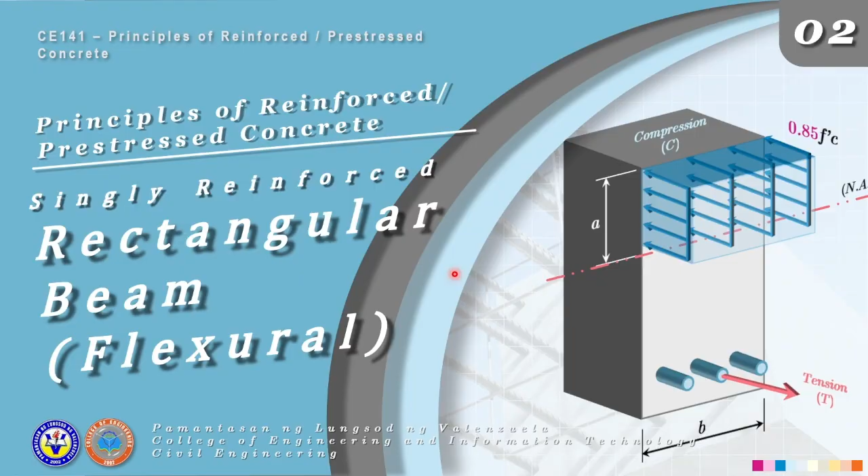In our discussion we will have two parts: analysis and design. For part 1, our focus is analysis. When we say analysis, we are not yet choosing the beam size or rebar — that is already given. What we will do is check the capacity of the given section. Later, our final objective is to get the nominal capacity, then we apply the strength reduction factor, since our emphasis is on ultimate strength design. So we will also get the ultimate moment capacity, and later we will compare those two. The basic idea is the emphasis on our ultimate strength design method.

Before we start, we need to understand the behavior of the beam, because a beam is a structural member that primarily resists bending or flexure. When a beam has a load, it bends, and when it bends, part of the beam is compressed and part is stretched. So for positive bending, we will later discuss compression and tension. Since concrete is weak in tension, we need to add reinforcement. That's why in singly reinforced beams, we need to emphasize the location of our steel reinforcement.

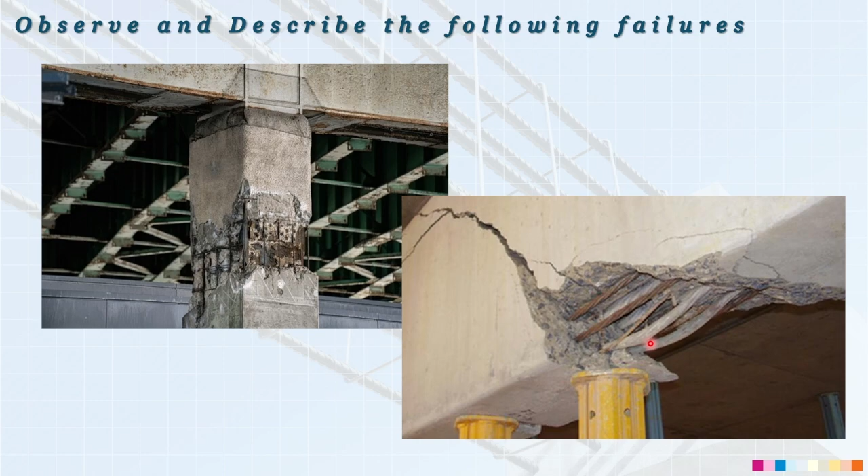As you can see in this structural failure, the steel is ductile, meaning our main reinforcement or steel bars are still intact. However, if you notice in this failure, the concrete failed or chipped away suddenly. So you are seeing this as an over-reinforced design — the highlight here is that concrete will fail first before steel. What does that mean? Before the steel yields or gives way, the concrete in compression experiences crushing or sudden crushing. Technically, when there is excessive steel reinforcement on the tension side, the steel does not yield.

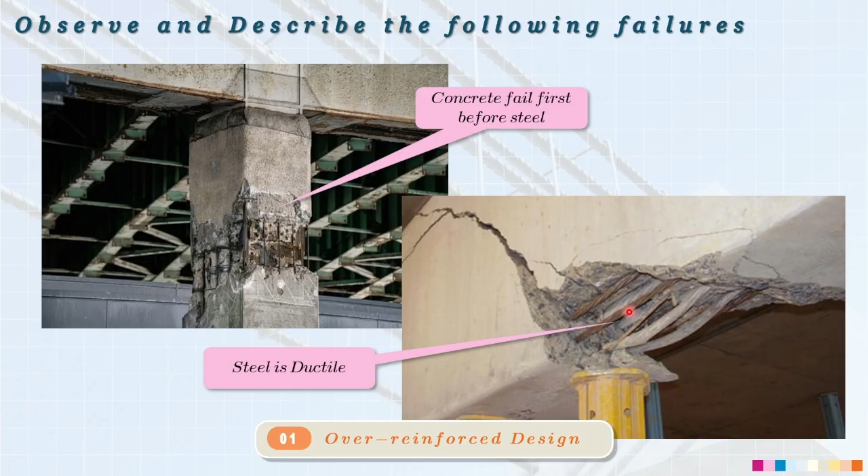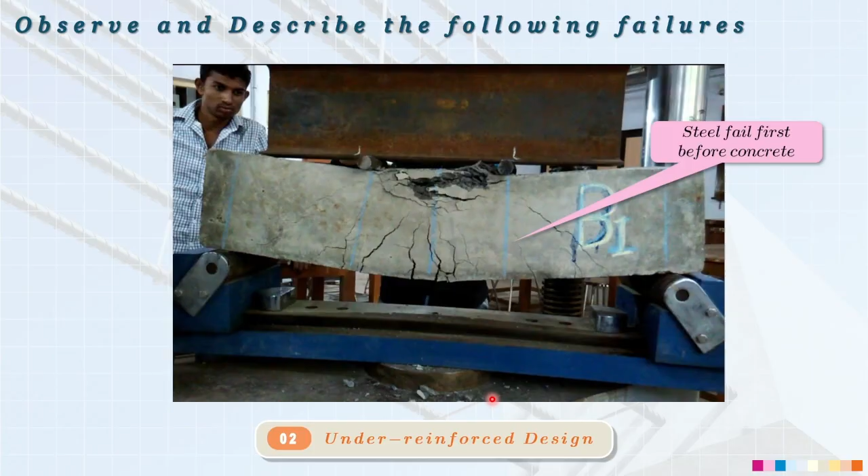On this text, on the analysis of singly reinforced beam, beams are structural members that mainly resist bending or flexure. Kapag ang beam, ang primary action niya is bending, of course may shear din. Pero ang pinaka magiging emphasis ng ating topic under this code provision, which is section 409.5, which is the design strength. Ibig sabihin lang nito, this is the code provision for our beams, sa mga horizontal members natin.

But to have an emphasis for this topic, ang magiging internal reaction na concern muna natin dito is all about bending moment, which is as you can see here in the first equation, yung ating nominal capacity multiplied by strength reduction factor should be greater than or equal to our design capacity or the ultimate bending moment. Ibig sabihin lang nito, this is the same principle coming from the ultimate strength design.

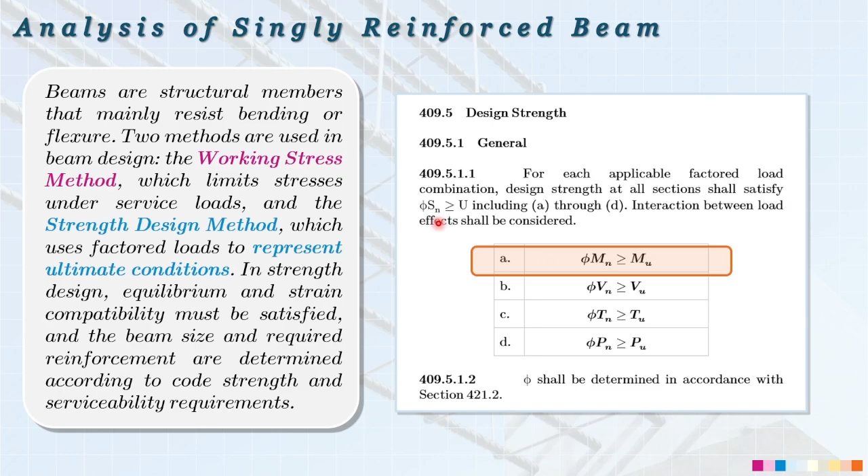All right, so let's proceed on our sectional analysis, okay? So meaning, hindi isang buong beam yung kailangan nating i-analyze dito. May mga portion lang tayo na kailangan nating i-analysis, especially on the design portion later on. So let's have here a simple supported beam.

So we have a uniform load and then ang maximum, kung meron tayo ditong simply supported beam with a uniform load, obviously yung magiging maximum moment natin ay nasa gitna or on this section. Dito sa section natin, kukunin natin yung mga forces na nag-act dito sa ating beam section, particularly yung compression force, tension force, the neutral axis depth, compression depth, block depth, steel stress, and yung mga moment capacities natin.

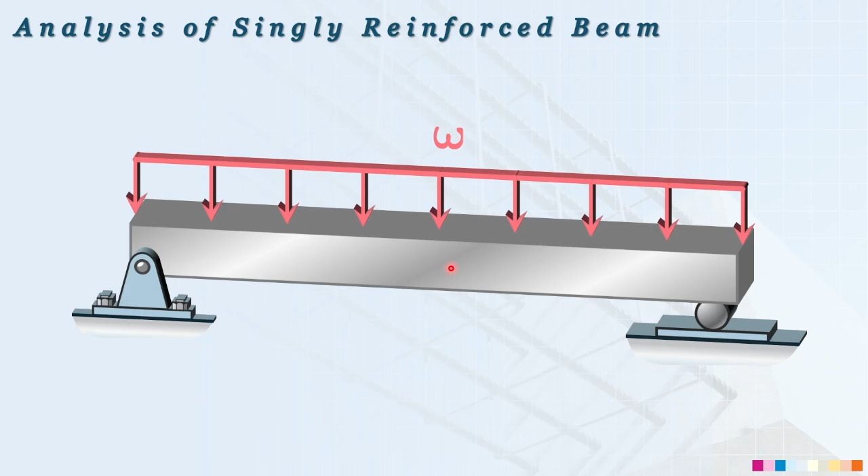Okay? So sa analysis natin ay parang hinihiwa natin yung beam sa critical section, then titignan natin kung ano yung nangyayari inside. Okay? So let's emphasize further.

So of course, kapag nilagay natin yung load sa ating beam, makakaranas yan ng deflection. Alam naman natin na ang deflection primarily ay nanggagaling sa bending. But of course, in order to further observe yung ating bending moment, as you can see here, magkakaroon tayo ng dalawang stresses.

Una, yung stress natin dito sa portion na ito kung saan yung top portion ay naiipit, ibig sabihin lang yan, it will experience compression. Doon naman sa ilalim, which is wala dito sa ating diagram, pero best to assume na kung ano yung nararanasan sa compression, babaliktad yung nangyayari sa baba natin, kasi yung bending natin dito is going downward, as you can see dito sa ating uniform load. So sa taas nakakaranas ng compression, sa baba nakakaranas ng tension on this part or section ng ating beam which is nasa gitna.

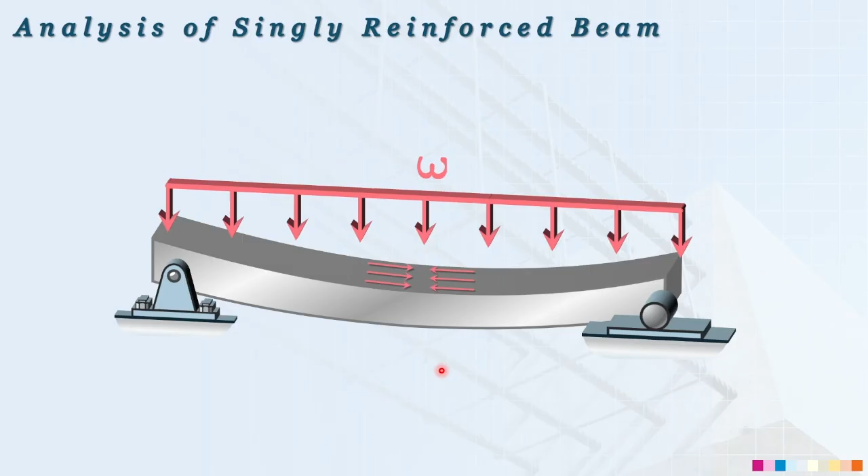All right, so let's have now the section. After natin ma-determine yung location na i-analyze natin, let's have this section. Best to assume that this is the center, or ito yung section midspan ng ating simple supported beam.

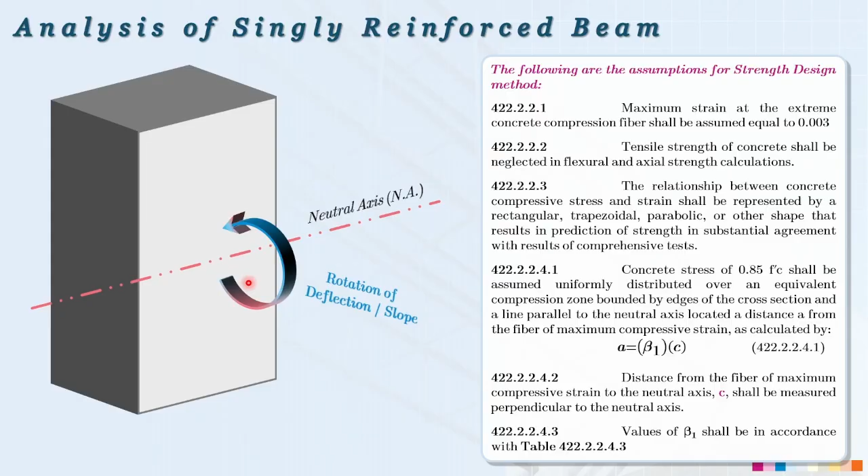As you can see here, yung rotation or yung deflection niya is being downward. So very important na ma-emphasize natin yung magiging bending ng ating beam section, dahil nga sabi ko nga kanina, this will emphasize dito yung compression and yung tension. Dalawang klaseng axial stress yung nararanasan ng ating bending moment.

So on the top portion, it will experience compression. On the bottom portion, this is to experience tension. Ibig sabihin, yung kalahati ng ating beam or the upper portion of our beam experiencing compression. Sa baba naman, nararanasan niya dito is tension, kasi nga nababatak nga yung fiber nung ating beam.

And actually, if we will refer in our code provision, nasusulat din yan. Ang emphasis natin dito is section 422.2.2.3, which is the relationship between concrete compressive stress and strain shall be represented by a rectangular, trapezoidal, parabolic, or other shape that results in the prediction of strength in substantial agreement with the results of comprehensive test. Ibig sabihin lang dito sa ating code provision, this is the general idea that our compression and tension, you can represent it into different kinds of shape loading.

Kaso, from your strength of materials, ito talaga yung emphasis ng itsura ng ating mga stresses. Ang problema lang natin dito is, since meron nga tayo ditong beam, dalawa yung nararanasan niya, compression and tension.

Okay, so in this section, alam naman natin, ulitin ko lang na yung distance ng fiber maximum compressive strain to the neutral axis C shall be measured perpendicular to the neutral axis. So once again, emphasis ko lang dito is yung value ng ating C is only the distance from the compression up to the neutral axis under parabolic stress block.

However, class, mahirap siyang i-compute numerically. That's why we need to complement it using this code provision, under section 422.2.2.4.1 na nagsasabi dito, concrete stress of 0.85 F prime C shall be assumed uniformly distributed over an equivalent compression zone bounded by the edges of the cross section and a line parallel to the neutral axis located a distance A from the fiber of the maximum compressive strain as calculated by this equation.

Okay, so emphasis lang natin kasi mahaba yung ating code provision for this one. Ang ibig sabihin lang niyan, para ma-compute mo itong parabolic stress block, ang pwede natin gawin dito, pwede natin siyang i-convert into rectangular stress block.

Okay, kaso once you convert it into rectangular stress block, yung ating variable C, which is the depth of the compression, ang mangyayari ngayon diyan class, mako-convert na siya into variable A. Na kung saan ang variable A natin, ang tawag natin dito is depth of rectangular stress block. Kasi nga, from parabolic stress block na nakikita ninyo dito, na-convert na siya into rectangular stress block.

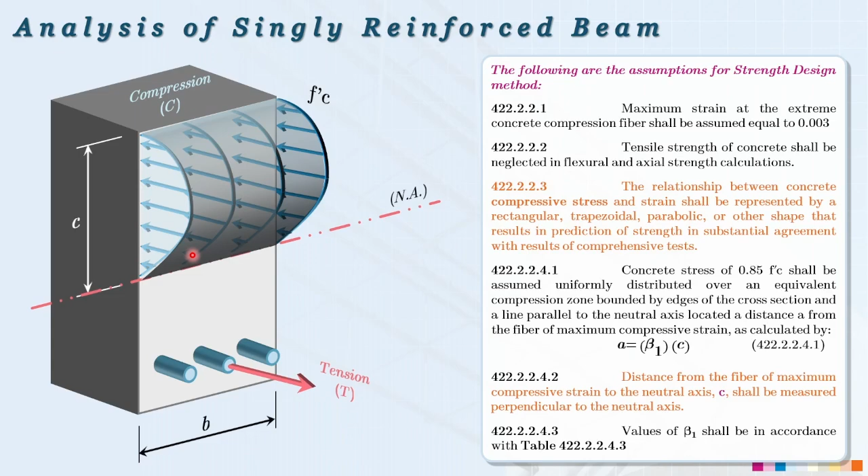Okay, kasi nga kung parabolic stress block ang gagamitin natin, actually wala namang problema. Kaso kasi class, gagamit lang tayo dito ng mga komplikadong integral calculus kasi nga, yung ating shape na nandito, ang mangyayari kasi diyan class, kukunin natin yung force. So ang mangyayari is stress multiplied by area.

Kaso kasi class, yung area mo dito, irregular siya. So para at least maging uniform, inaalalayan tayo ng ating NSCP code provision under this section na i-convert natin from parabolic stress block up to rectangular stress block.

So ang magiging emphasis lang natin, yung ating depth of compression, magiging depth of rectangular stress block, which is in terms of A. So para ma-convert natin yan, class, we need to multiply it with the beta 1. Yung beta 1 natin, this is just a factor so that we can convert it into depth of rectangular stress block. Kaso ano nga ba yung mga values ng beta 1 na pwede natin gamitin?

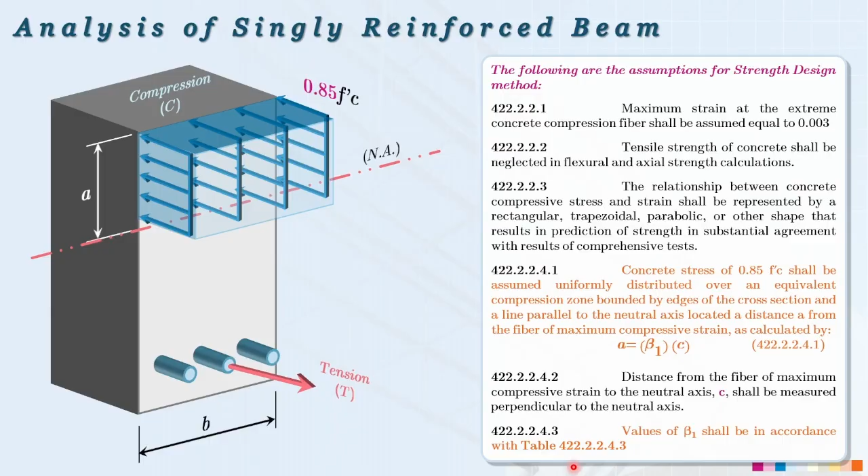Okay, so dito naman magko-complement itong code provision na ito, which is the section 422.2.2.4.3. The values of the beta 1 shall be in accordance with the table 422.2.2.4.3, which is presented in this table. So ito lang yung ating emphasis ng ating beta 1 para ma-convert mo yung depth of stress block, which is yung C, into depth of rectangular stress block A.

Okay, so ibig sabihin lang nito, yung ating beta 1, makukuha mo lang yung mga values niya depending on the values of our F prime C or on the values of our compression stress. So emphasis lang natin to. Makukuha mo lang ang 0.85 kapag ang value ng F prime C mo between 17 megapascal and 28 megapascal. So kapag nag-sit in right dito sa range of value na ito, ibig sabihin your value of the beta 1, automatically this is 0.85.

However, if your value of your F prime C is greater than 28 megapascal but less than 55 megapascal, you will use this special equation para magamit mo si beta 1, which is what you need to do here. You need to use this equation by substituting your value of F prime C, which is greater than 28 megapascal and less than 55 megapascal. So dito mo makukuha if this value of your F prime C falls under this criteria.

Okay, and lastly, for our last value of your beta 1, of course, if the value of your F prime C is more than 55 megapascal, ang gagamitin mo na dito, of course, the 0.65 as your value of your beta 1. Okay, so ano nga ulit ang emphasis ng beta 1? Para ma-convert mo yung depth of stress block into depth of rectangular stress block. Kumbaga, from parabolic, co-convert natin siya into rectangle.

Okay, so now since ito na yung magiging basis natin for our analysis, so we have some additional code provision na kailangan nating isatisfy or kailangan natin ditong gamitin. Okay, so let's proceed with the section 422.2, Design Assumptions for Moment and Axial Strength. So etong code provision na to, dito na natin i-emphasize yung mismong topic natin, which is the flexural analysis of a singly reinforced beam.

Okay, so let's proceed right away with the section 422.2.1.1 na nagsasaad dito, equilibrium shall be satisfied in each section. Okay, tapos pangalawa, the section 422.2.1.2, strain in concrete and non-pre-stress reinforcement shall be assumed proportional to the distance from the neutral axis.

So ibig sabihin lang nito, class, aside doon sa ating stress, okay, you need to also emphasize din yung paggamit natin dito ng strain, which is later on I will explain. I will explain dito yung maging relationship ng mga strains natin.

Okay, and lastly, under the section 422.2.2.1, maximum strain at the extreme concrete compression fiber shall be assumed equal to 0.003. So ang ibig sabihin lang nito, class, yung strain or yung relationship between ng deformation for our concrete is always ang value na palagi is 0.003. Kumbaga, fixed value na po yung magiging strain nung ating concrete.

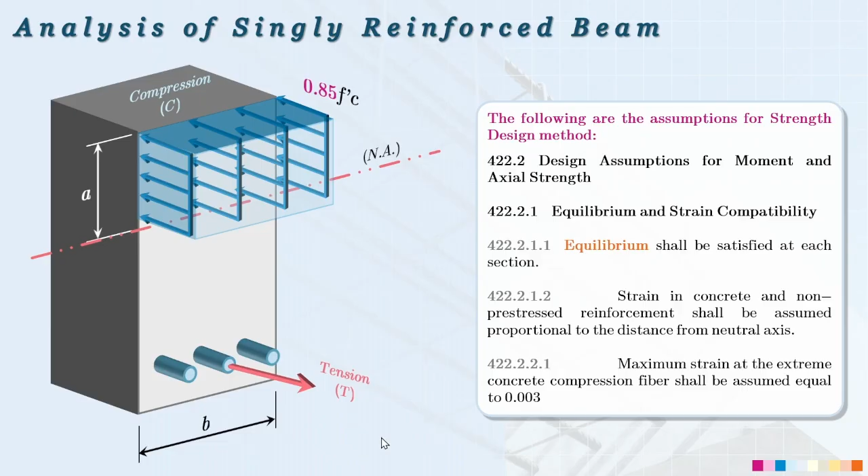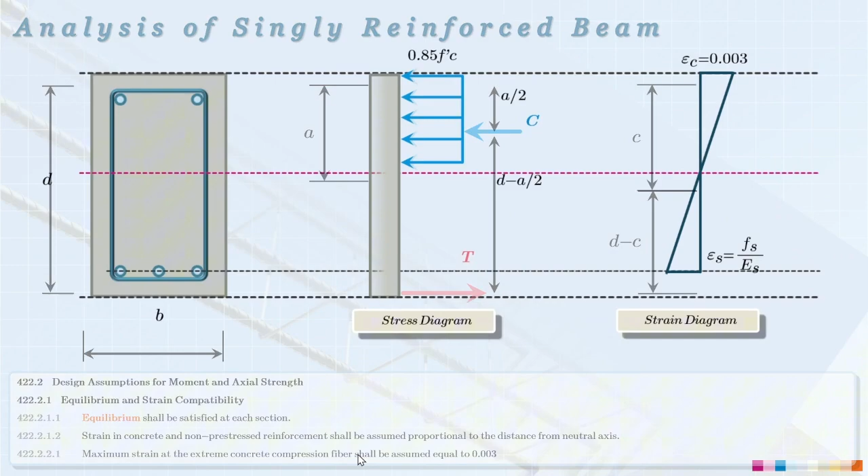Kaya lang, following with this provision, dapat yung ating strain ng ating concrete has a fixed value of 0.003. While yung sa ating steel naman, of course, from your strength of materials, we can use here the stress over the modulus of elasticity. However, we will just emphasize dito yung galing sa ating strength of materials, okay, or specifically on our steel material. All right, so let's start the derivation of the following formula.

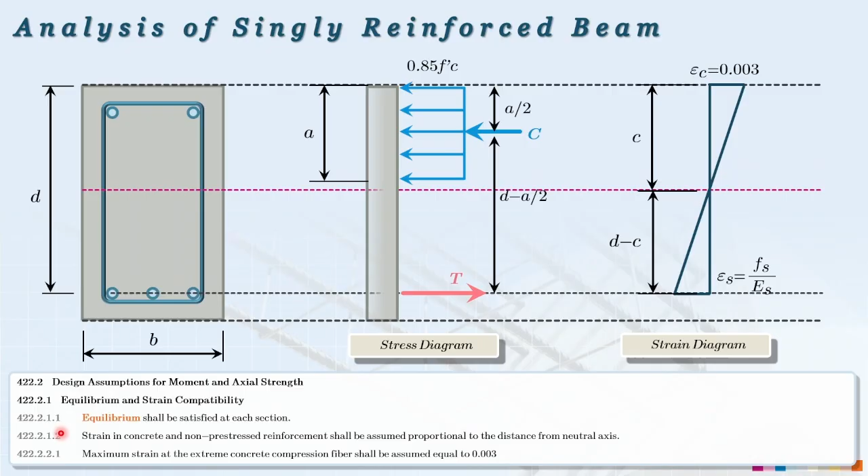Class, kailangan pa rin natin i-emphasize itong tatlong provisions na ito under equilibrium and strain compatibility. Let's start with our force equilibrium. Ibig sabihin lang nito, ang focus natin dito ay galing sa stress diagram. Tingnan nyo lang na mabuti kung ano yung magiging considerations natin under this stress diagram.

Under force equilibrium, we can use the summation of forces along x. Ibig sabihin, puro horizontal ang i-consider natin dito. Dalawang forces lang ang i-consider natin for the horizontal, which is yung tension at yung compression. Yung tension natin galing kay steel, yung compression natin galing sa concrete. So tension minus compression is equal to zero, satisfy yung ating summation of forces of x.

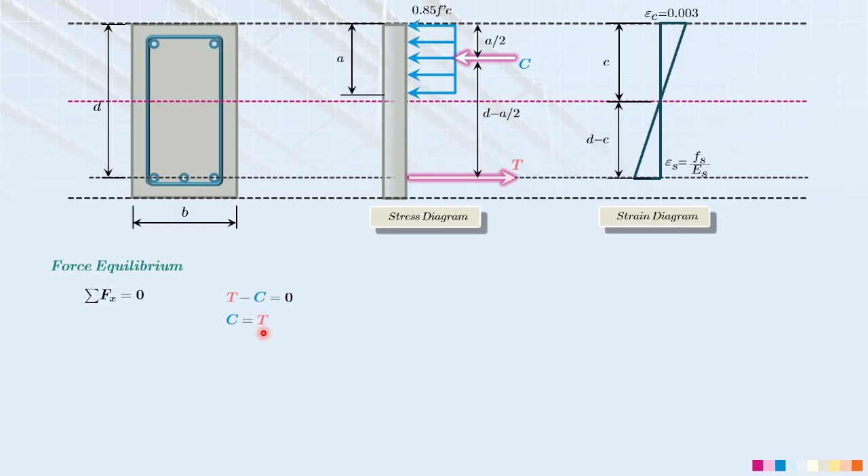Ang gagawin ko lang, lipat ko lang sa kabila yung compression. So ibig sabihin lang nito, compression is now equal to tension. Magde-derive lang tayo ng mga formula galing dito sa relationship na ito. May mga i-recall lang tayong mga formula galing sa strength of materials.

Alam naman natin na ang stress is equal to the actual force divided by our area, yung area which is subjected sa stress. Ang gawin ko lang, computing ko lang dito yung actual force by simply cross-multiplying yung aking area sa aking stress. So ito yung lalabas: P is equal to sigma, which is stress, multiplied by area.

Incorporate natin siya dito para sa compression and tension. Kapag nag-consider tayo sa compression, alam naman natin na ang stress dito ay equal sa 0.85 F prime C, yan yung magiging stress ng ating compression. Then yung ating area dito is the area of the compression, ibig sabihin kung ano yung sakop ng ating rectangular stress block, yun lang ang i-consider mong area. Yung area natin dito ay simply ang depth of rectangular stress block multiplied by the width of our beam. So by simply substituting para sa ating compression, ito yung magiging actual force niya.

Ulitin ko, ang stress natin for the compression ay ang converted 0.85 F prime C, at yung area natin is the area of compression which is the depth of rectangular stress block multiplied by the width of the beam. Ito yung purpose noong ating supported provision na pwede natin siyang i-convert from the parabolic stress block to the rectangular stress block, para madali nating makuha yung kanyang equivalent actual force which is in terms of compression.

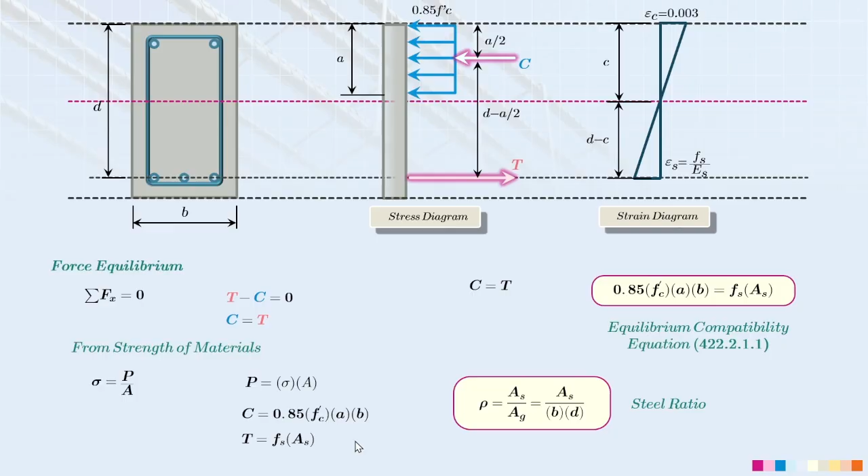Additionally, sa ating code provision, may tinatawag tayong steel ratio. Ano nga bang ibig sabihin ng steel ratio? Ibig sabihin lang nito, this is just the relationship between the ratio of your area, area ng reinforcement over the gross area. Please take note, kapag sinabi nating gross area, ito ang area ng concrete mo kung nasaan yung ating effective depth.

Later on, dito sa ating steel ratio, babalikan natin yan, especially in the non-rectangular sections. But for now, ang pwede nating i-consider dito for our steel ratio ay ang relationship ng steel area, o ang area ng main reinforcement, divided by ang ating base or the width of the beam multiplied by the effective depth, which is yung area na nasasakop dito. Yan yung magiging second formula natin for our analysis of singly reinforced.

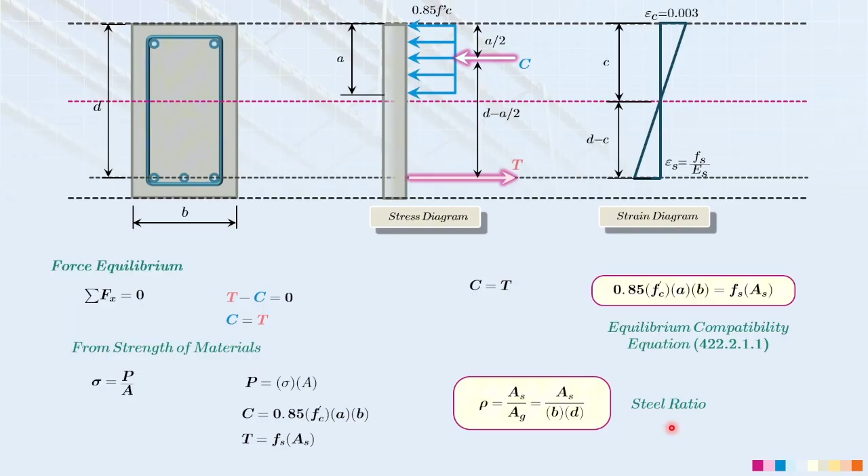Nasatisfy na natin dito yung condition for the force equilibrium or the equilibrium itself. Ibig sabihin nito, we are done dealing with our stress diagram.

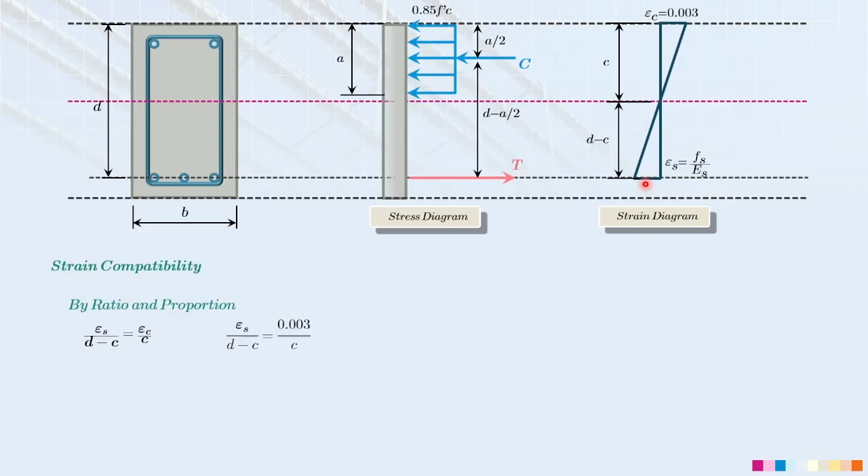I'll substitute the value for the strain of concrete, as presented in our strain diagram. So this becomes the substitution. We can determine the value of the strain of our steel reinforcement by cross multiplying the effective depth minus the depth of neutral axis. So that's the next equation you'll see.

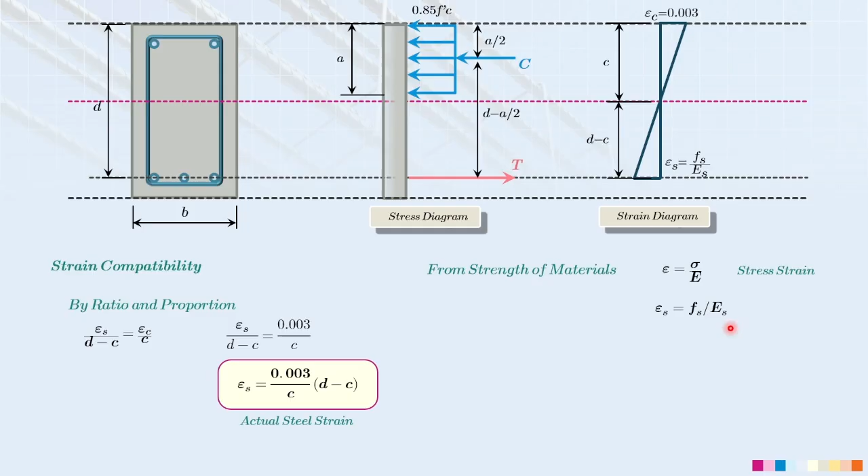You can use this equation if you want to get the actual steel strain. But from strength of materials, you can also use stress divided by modulus of elasticity. Of course, we need to conform this to our material. You can use this too, but remember that the modulus of elasticity of steel we'll use is 200,000 megapascal.

But along the way, let's derive another formula from here. We can also compute the actual stress of our main reinforcement by substituting the steel strain coming from strength of materials. So this becomes our next equation. But remember that the value of the modulus of elasticity of steel is equal to 200,000 megapascal.

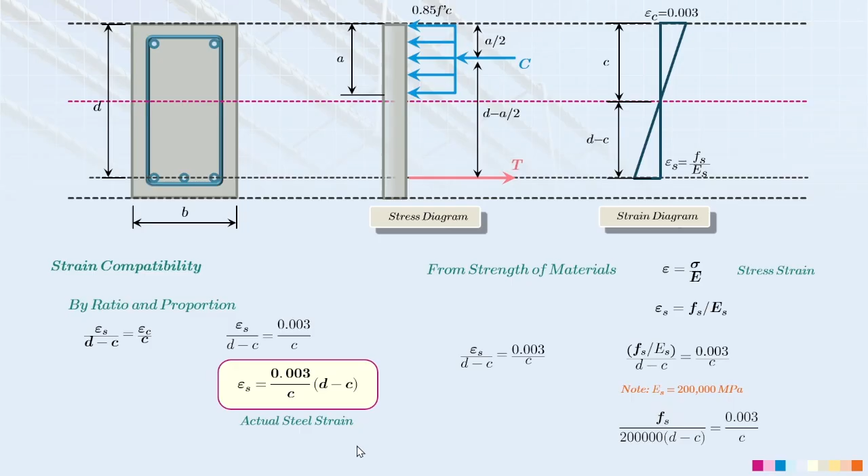So I brought down the modulus of elasticity, then substituted 200,000 megapascal. Next, to get the stress of our steel, you can do cross multiplication. Performing the cross multiplication, the next equation we can derive is: the actual stress of the steel is now equal to 600 multiplied by effective depth minus depth of neutral axis, over depth of neutral axis.

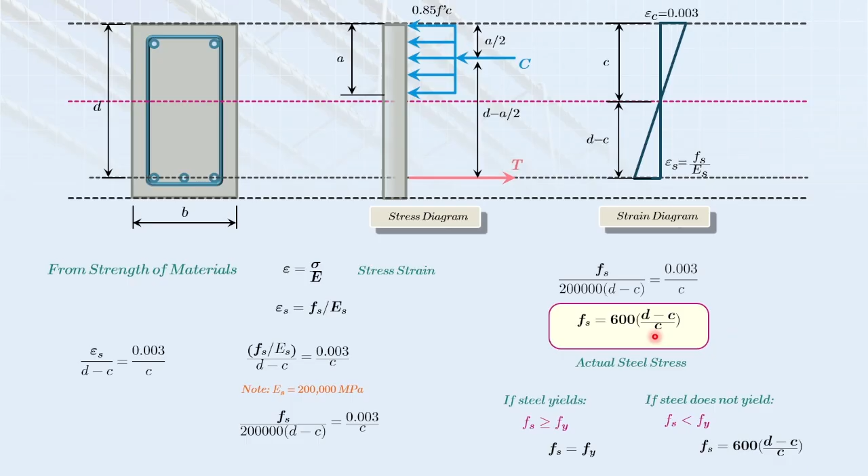Now let's compute for our flexural strength. This means we'll have two sets of flexural strength, though their derivation will be similar. First, I'll reference my flexural strength, or bending moment, on the tension side. This highlights the actual load and the moment arm, which is obtained by subtracting from the effective depth half of our rectangular stress block.

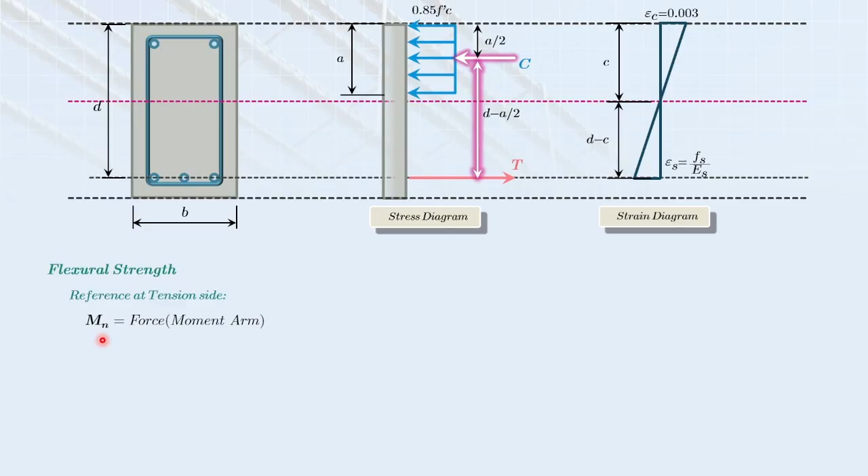From our theory of structures, you can utilize this. So technically, the bending moment we get first here is what you call the nominal moment, which is force multiplied by the moment arm. However, since we're taking moment at the tension side, the force here becomes compression, and our moment arm is still D minus A over 2.

Class, yung kanina, yung ating compression force, actually you can substitute back yung kinumpute natin earlier. So yun yung magiging first set ng ating nominal moment, in this manner. Yan yung magiging nominal bending moment natin.

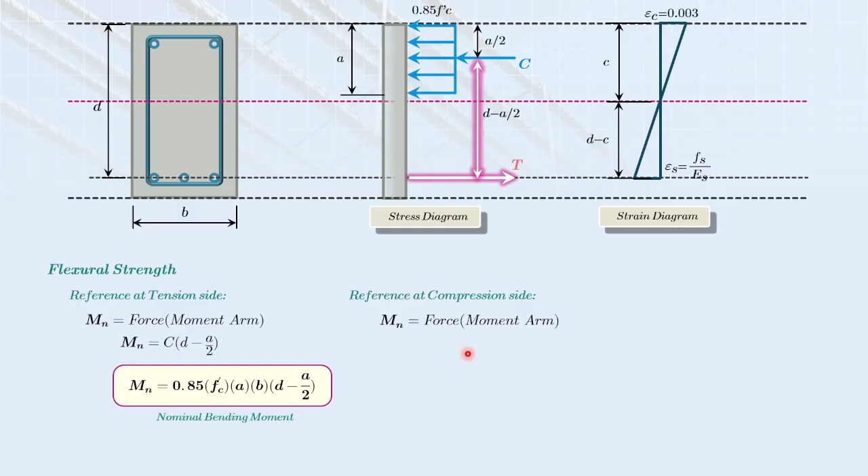Actually, you can also derive the other way around para makakuha ka ng nominal moment sa ating beam section kapag ikaw ay nagmo-moment naman sa compression side, which is same manner lang naman din, force multiplied by your moment arm. Kaya lang yung magiging force mo dito ay magiging tension na siya. Then yung moment arm natin, same lang siya coming from the first derivation natin dito. Tapos i-substitute back lang natin yung ating tension, which is na-derive natin kanina, para makapag-compute ka ng nominal bending moment. Actually, either of the two ang pwede mong gamitin.

Kung magmo-moment ka sa compression, ito ang gagamitin mo. Kung magmo-moment ka sa tension, ito naman ang gagamitin mong formula. Pero please take note, since magkakaroon tayo ng couple effect ng compression and tension, ibig sabihin lang yan, either of the two, parehas lang po yung magiging nominal moments natin.

Okay, na-address na natin dito yung nominal moment. Ibig sabihin lang nito, para makuha natin yung ultimate or yung bending design moment natin, what we need to do here, we need to apply the principle of our ultimate strength design. Ibig sabihin lang yan, para makuha mo dito yung ultimate strength, you need to multiply your nominal strength sa ating strength reduction factor, which is yung phi. So this is now our design bending moment equation.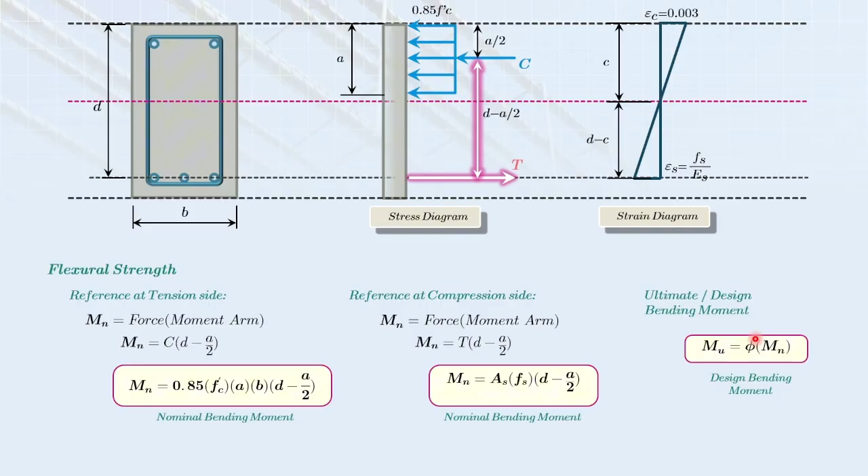Kaso pagdating natin dito sa ating flexural strength, na-address na natin dito yung nominal moment, we need to address here yung ating strength reduction factor. Ano nga ba ang mga ginagamit nating strength reduction factor under flexural analysis, which is provided by this equation.

Under section 422.1.3, design strength at a section shall be taken as the nominal strength multiplied by the applicable strength reduction factor phi given in section 421. Which means that under section 421, medyo mahaba kasi yon. Ibig sabihin lang nito, this is the applicable strength reduction factor para kay moment.

Ibig sabihin lang nito, class, kapag kinuha natin dito yung actual steel strain and we will compare with each other, ito yung makukuha natin na mga values ng strength reduction factor. Kaso for our emphasis here and for our simplicity here, ang gagawin lang natin dito, this variable of our strain for the grade 280 deformed reinforcement, papalitan lang natin siya ng 0.002. Okay, emphasis lang natin.

Ayan, so mas malinaw na nating i-discuss kung paano natin kukunin yung ating strength reduction factor. Ganito lang yan, class: kapag nakuha mo yung actual steel strain, and this is less than or equal to 0.002, ang classification natin dyan, class, is compression controlled. Ano ang ibig sabihin ng compression control? Ang ibig sabihin lang po niyan, mas mauunang mag-fail yung ating concrete, or should I say, this is now under over-reinforced design. If that is the case, class, yung magiging strength reduction factor natin or yung value ng phi is now equal to 0.65. Automatic na po yun kapag yung ating strain is less than or equal to 0.002.

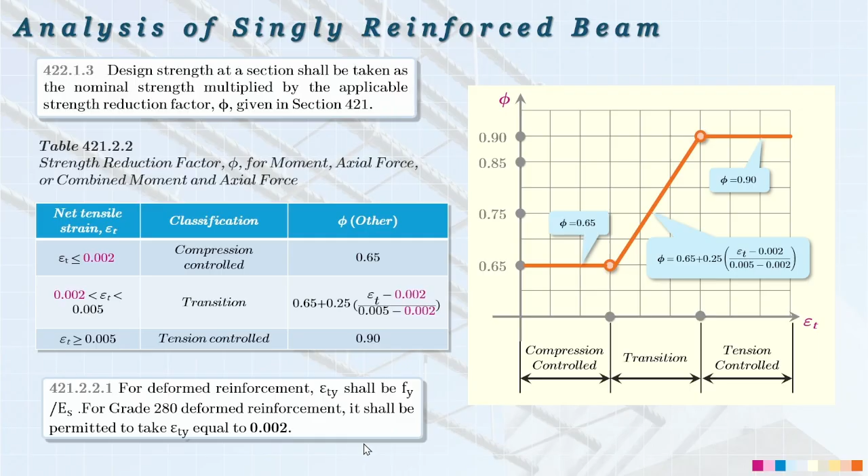Okay, so let's proceed sa different types of failure at the strain limits natin. May mga iba't ibang types ng failure. So first is the balance section. Kapag sinabi nating balance section, ideally, class, sabay nagfa-fail yung concrete tsaka yung ating steel reinforcement.

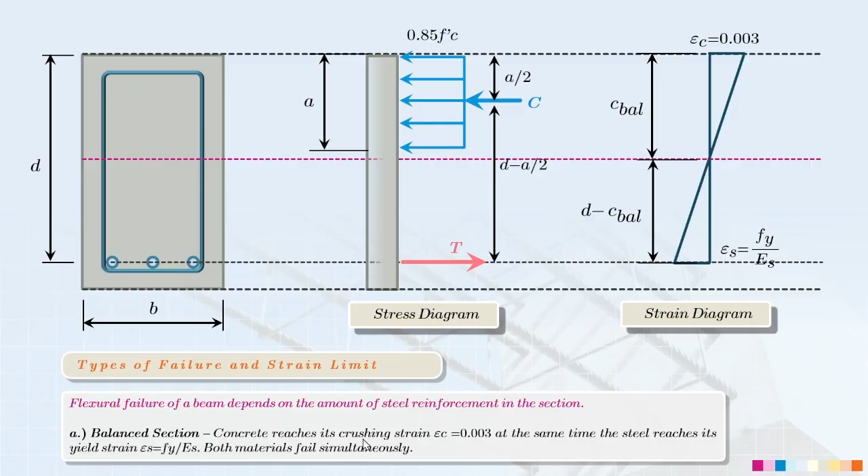Ibig sabihin lang nito is nagre-reach yung ating strain ng concrete to 0.003 at nagre-reach ng strain according to this value. Ibig sabihin simultaneous silang nag-fail. So ano nga ba yung mga formulas that we can derive under this condition?

Solve muna natin dito yung ating depth of stress block under the balance condition. So recall lang natin, coming from our strain diagram, we can emphasize here the usage of our ratio and proportion, which is the ratio of the base and height.

Ngayon, sabi ko nga kanina, kailangan natin kunin yung tinatawag na C balance or the depth of stress block under the balance condition. What we can do here is we can substitute yung ating strain of the steel according to the stress over the modulus of elasticity, under this substitution.

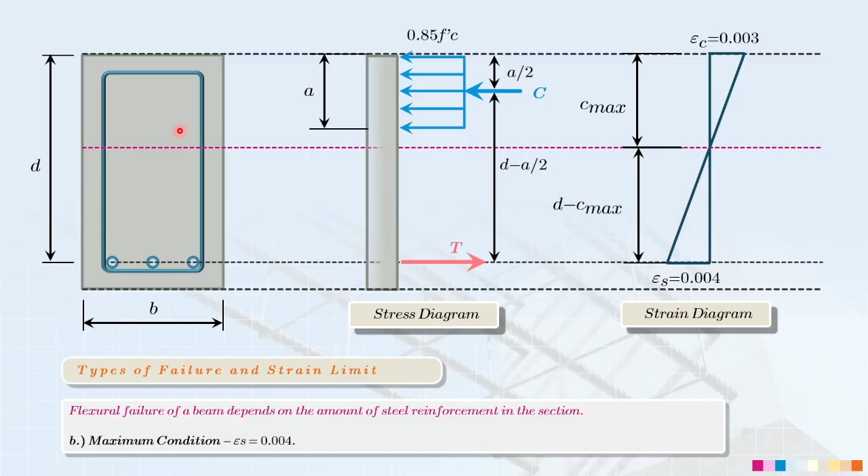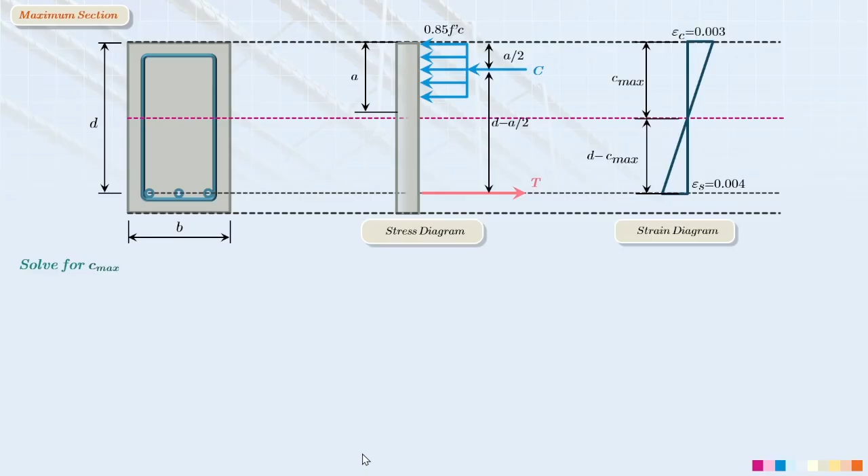Kapag maximum condition, obviously, hindi na nagfe-fail dito ng sabay yung ating concrete and steel. Usually, kapag maximum section or maximum condition, ibig sabihin lang nito, mas nauuna na pong mag-fail yung ating steel kaysa sa concrete. Or should I say, this is now under the under-reinforced section, which is yun naman yung ideal na gusto natin. Mas gusto muna nating bumigay yung steel kaysa sa concrete. So, of course, same lang with our balance condition. Let's take first the equation na mabubuo natin under the depth of stress block under the maximum condition.

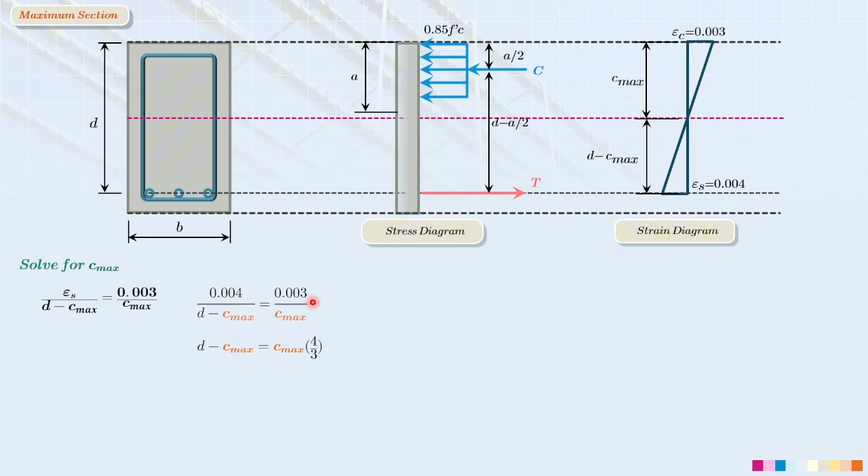So, of course, we can use once again our strain diagram, the ratio and proportion. Substitute the value of our steel strain. In this case, it's not Fy over E since it's just a balance condition. So what we substitute here is 0.004 since we're at the maximum condition. Same manner as before, what we do here is cross multiply, actually dividing 0.004 by 0.003, which gives us 4/3.

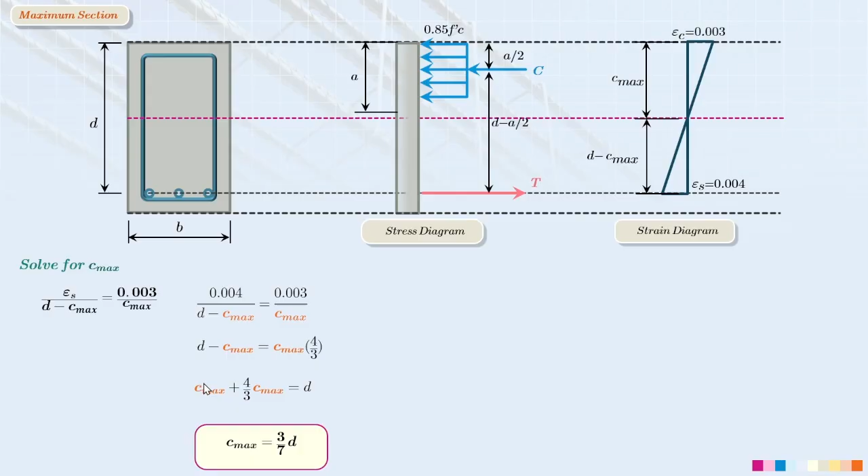Next, we combine the similar terms. 1 plus 4/3 gives us... sorry, let me correct that, it's 7/3. So cross multiply for our effective depth to get the depth of stress block under the maximum condition, which is now 3/7 multiplied by our effective depth. That's what you use when finding the depth of stress block under maximum condition.

Now let's solve the steel ratio under the maximum condition. This is important, class, especially later when we get to design. Let's recall our formula for steel ratio, then solve the steel area in terms of our steel ratio and gross area, emphasizing again our equilibrium compatibility, then substitute the necessary conditions.

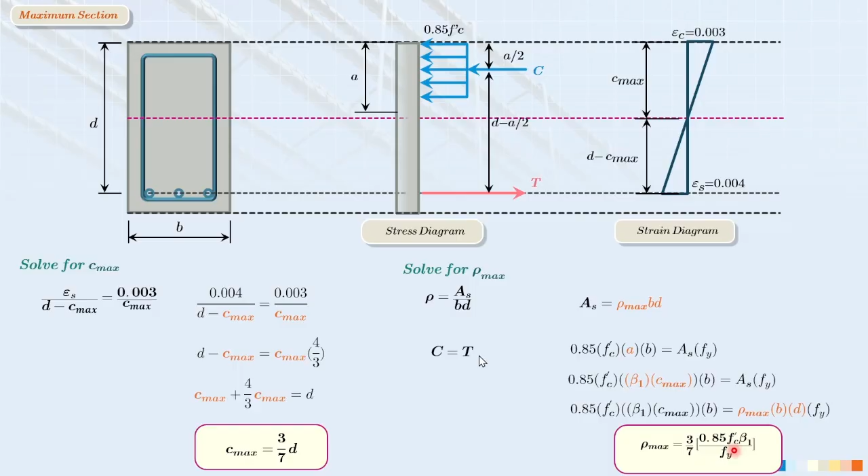We can use this more in the design aspect. But for our analysis, most likely we won't encounter this steel ratio - it's mostly used in the design portion. Okay, so we're done with balance condition and maximum condition.

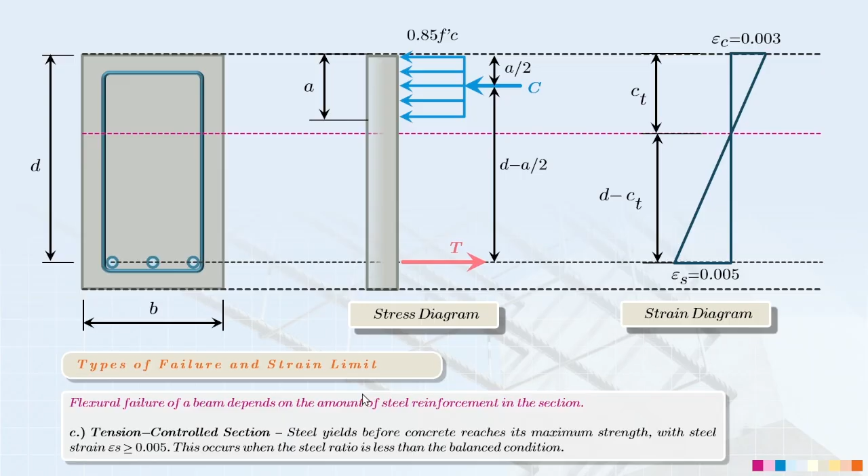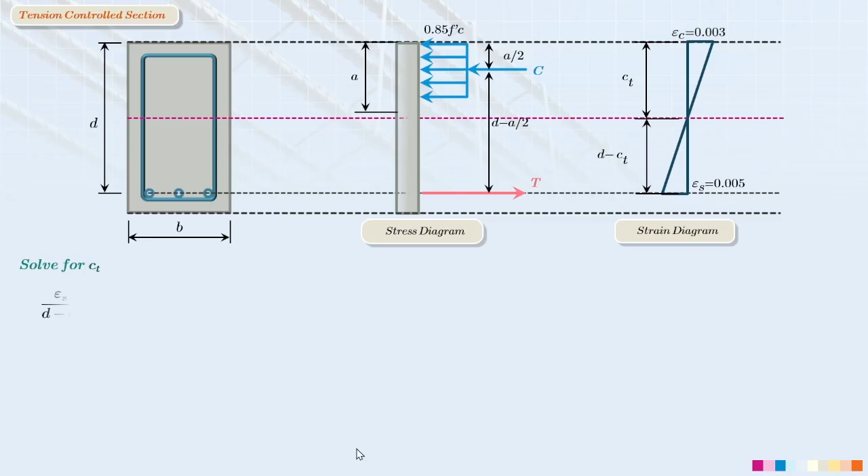Next is the tension controlled section. For tension control section, this means that at maximum, we consider the strain of our steel to be 0.004 - this time it's more than or equal to 0.005. So what equations can we mostly use? Same as before, we can determine the depth of the rectangular stress block, emphasizing C sub T. Same as what we did earlier, we use the relationship of our strain diagram using ratio and proportion, so that under the tension control section, this is now 3/8 multiplied by the effective depth.

Same manner to get the steel ratio for our tension - same approach, and this is the resulting equation. We emphasize again our equilibrium compatibility.

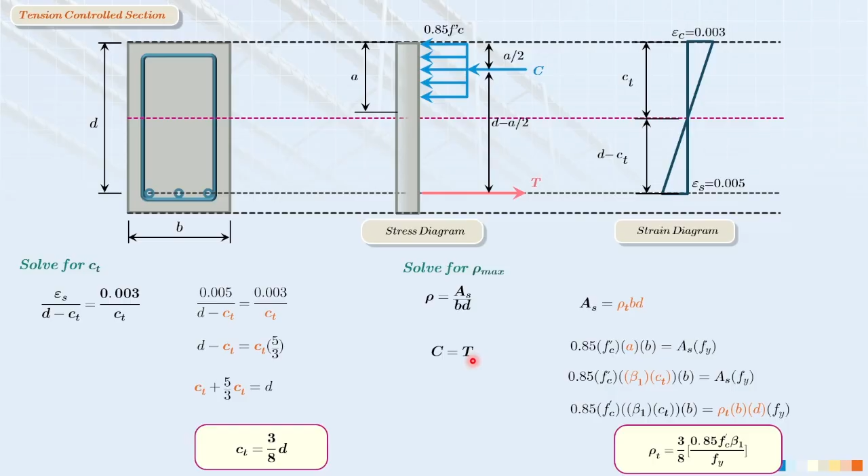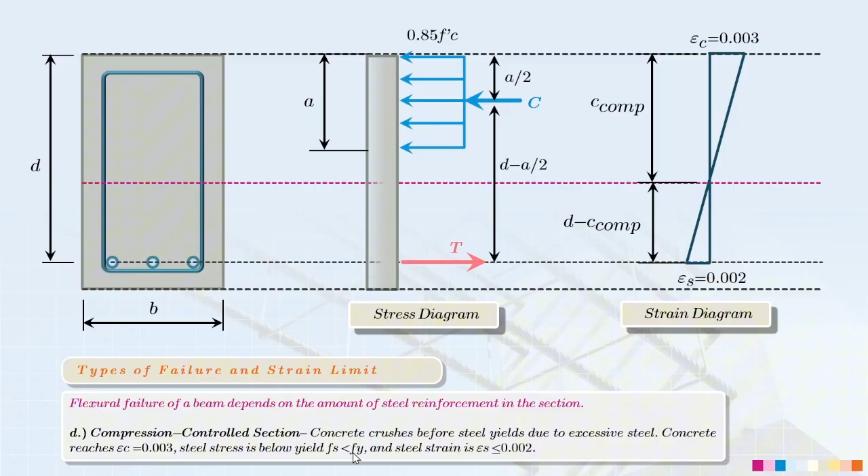And the last type of failure is now the compression controlled section. This means, class, that the value of strain is now less than or equal to 0.002. But class, what we derived earlier is more important - the maximum condition and the tension controlled section.

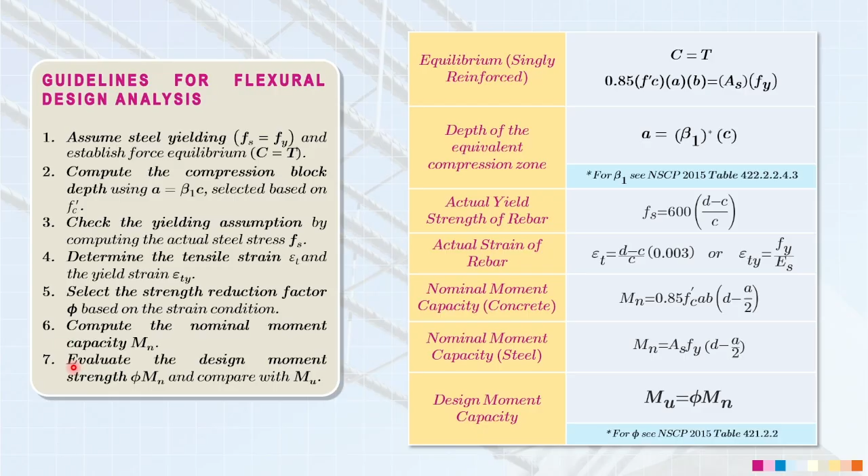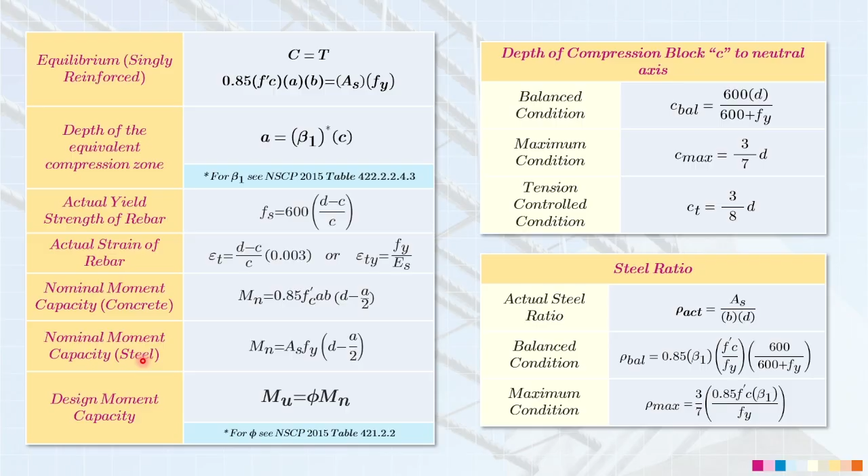So in our summary, these are the presented formulas I showed earlier. Note that for flexural design analysis, these 7 steps can actually be reduced to 4. So later, in our sample problems under the analysis of flexural strength of a singly reinforced beam, we'll follow 4 easy steps to solve its flexural capacity. These are the following summary of our derived formulas. Next up will be our first sample problem in the analysis of singly reinforced beam.